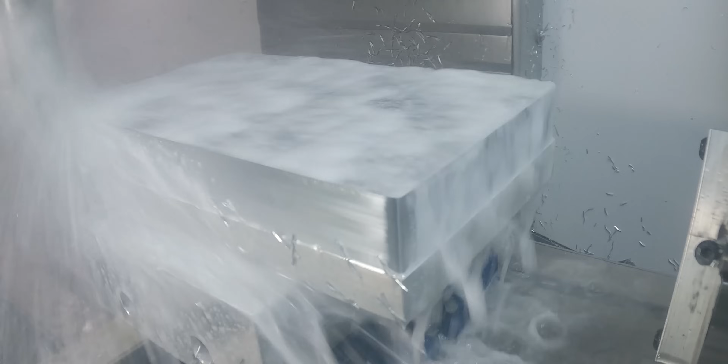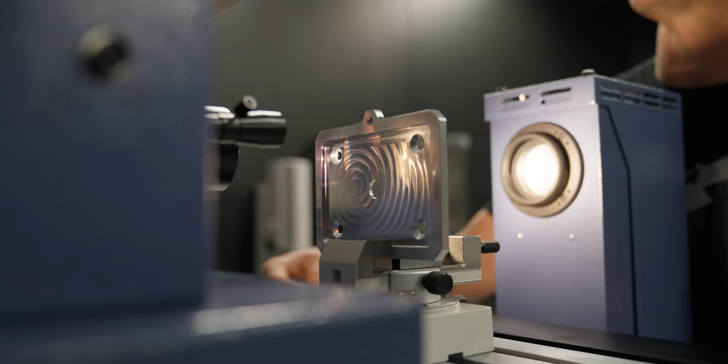This is a crazy manufacturing story, and this is why I absolutely love my job. Found my purpose, and check this out.

You gotta understand the backstory, because one night Justin was in bed. He'd just gotten divorced. His whole life had basically crumbled. And he's in bed and he's on YouTube. He doesn't know me, he doesn't know anybody. And his cousin Hank is in the motorcycle business.

He's on YouTube and comes into Titans of CNC, watching a video where I'm just talking about bringing jobs back to America, rising to greatness, talking about my life and the things I've been through. He's literally watching this video and becomes inspired. He starts watching all of these videos, and he has renewed hope, renewed everything. And he knows at that moment, this is what he was made for.

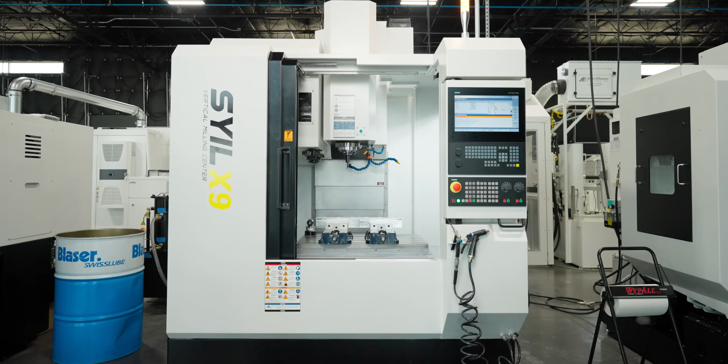So much so that he takes everything, talks to his cousin who has a company, Chop Chop Speed Shop, and they come together and Justin goes and purchases a CNC machine from Titans of CNC. So he watches a video, gets inspired, and months later he actually buys a CNC machine from us.

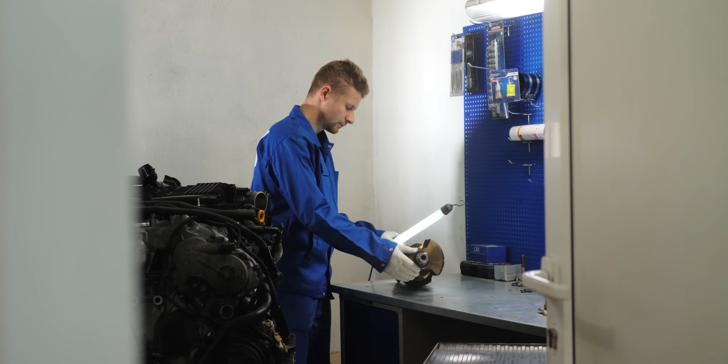He actually takes our classes online. He goes and learns how to design aftermarket parts. He figures out all the different parts. He comes to us, we look at the parts, we find a machine that's perfect for him at an affordable price. We partner with him.

The machine is actually coming in. He's never even seen the machine yet. He has never seen a SYIL before in person, but we actually surprise him. And that's where everything comes full circle.

Not only are we selling him a machine and partnering with him for his success, but I actually worked with Barry and said, you know what, let's actually program his parts. Check this out, and the boys are here.

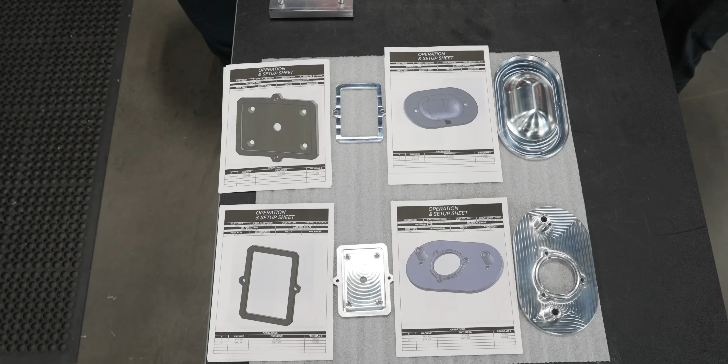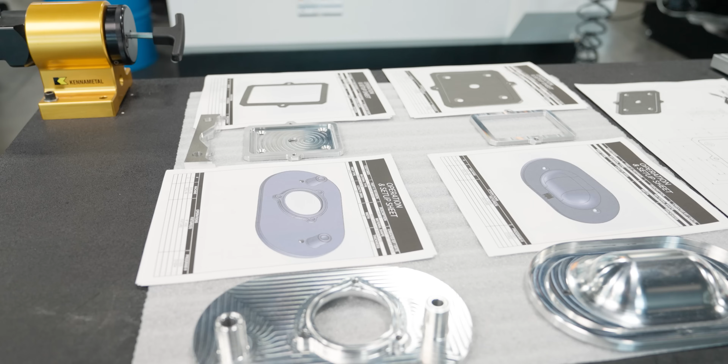What's up? So you guys needed help with the programming. We actually went ahead and tooled it up and machined the parts complete for you. Barry designed a crazy fixture that actually fits all 4 parts on it. We're gonna give you all the carbide tooling and the parts and the programs to help you guys start your journey into CNC machining.

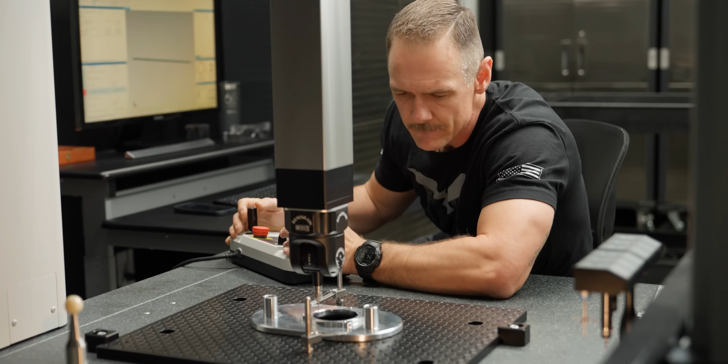Wow, that's super good, super above and beyond. Programming is everything, but now you know the programs are good because you actually have good parts. We put them on the CMM, and Travis did the inspection on them. Surprisingly, everything that Barry programmed and Steven ran came out absolutely perfect.

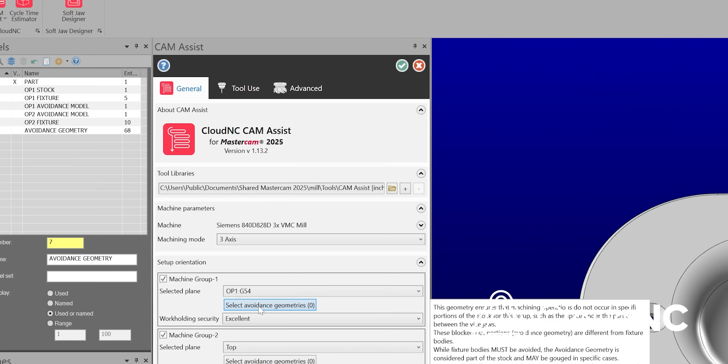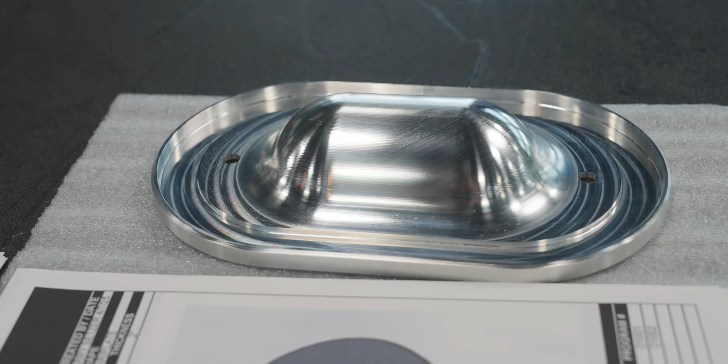So miracles do happen, man. We had 4 different parts, so Barry programmed 3 of them. We gave 1 to Jesse, and Jesse brought up CAM Assist from CloudNC and programmed that, which was basically cheating because it happened in seconds. He made a few adjustments in the program, and we ran it, and the parts came out absolutely beautiful. So Jesse was done in a couple seconds, but Barry had to work all day on those programs, and boom, we got the job done.

This is a very young business, so we're growing, and we work full-time jobs too. We're busy during the day, and we come home and burn the midnight oil trying to make it happen. Unfortunately we can't get it to move as fast as we want, but hopefully things take time.

Took you up a notch, right there. This, I can't thank you enough. He's been looking at the parts. He actually already put money down and purchased a machine, but he hasn't seen the machine yet, and it's right there. So he's looking at the parts.

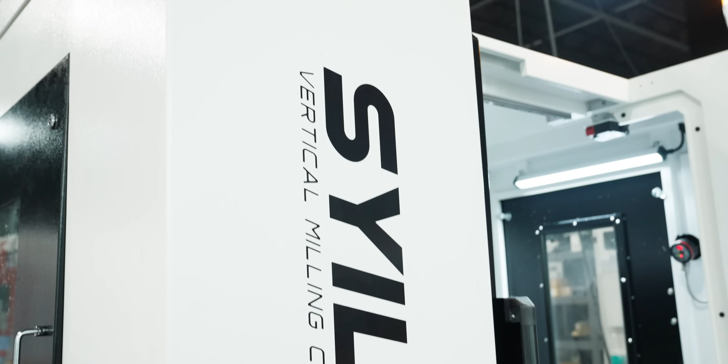You want to check out this bad boy for a minute? The X9. This thing is solid, man. This thing is a beast. If you actually went to a leading competitor, the same machine basically costs about 30% more, and this one's 13,000 pounds while the other one's like 8,900 pounds. So it's just built rock solid.

I don't want to steal Keith's glory, but Schneeberger castings, stainless way covers, you know what I mean? Siemens control. Siemens control, boom.

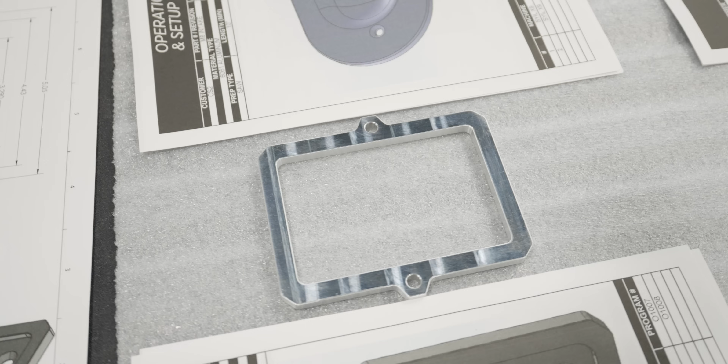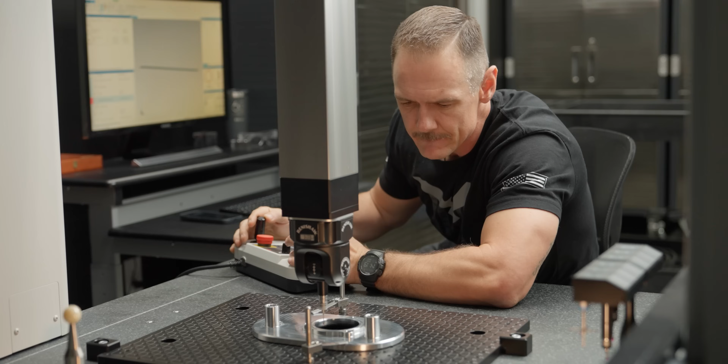Now that Justin is seeing how we actually went about machining these components, now he gets it. He can learn from these first 4 parts, and every part that he thinks of, now he can think about the manufacturing process. He can also send parts to us, and we can help him with that thought process, with the mindset to machine them efficiently.

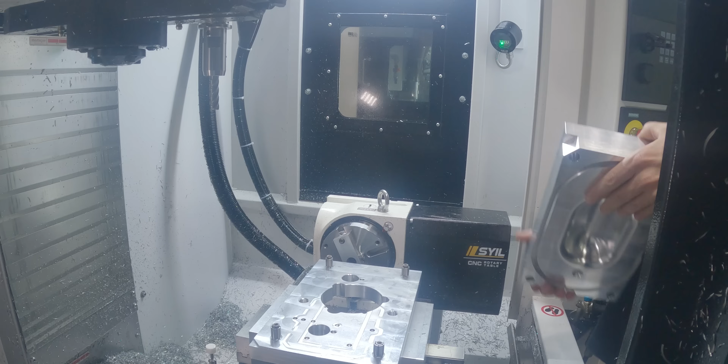So now he can leave our shop. His mind is open. He's seen the machine. Now it's about rising to greatness, going after it, and putting the work in. If you make it happen, if you actually grind and have tenacity and talent, and you go after it, no matter what, you never stop. No matter how big the roadblocks, you figure out a way to get past them, and you will be successful.

So to Justin and Hank and everyone out there going after their dream, rise up, go after it. Nobody has your talent. You were made for this, so go get it. Boom.